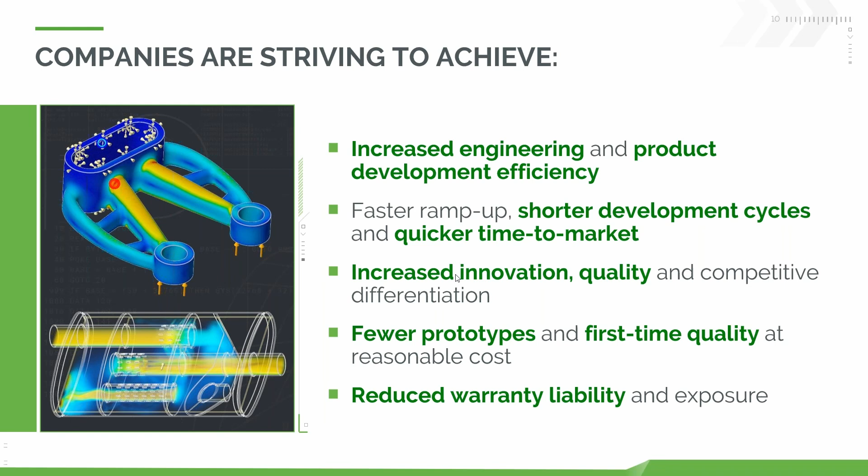And hopefully that then, if it should, then reduce our liability if we're producing a large number of components. Okay. So this is how it helps an engineer: a deeper understanding, validating your design, which of course you need to do quickly and early in the design process. Evaluate the design flaws or any potential design flaws, and if required, optimize designs.

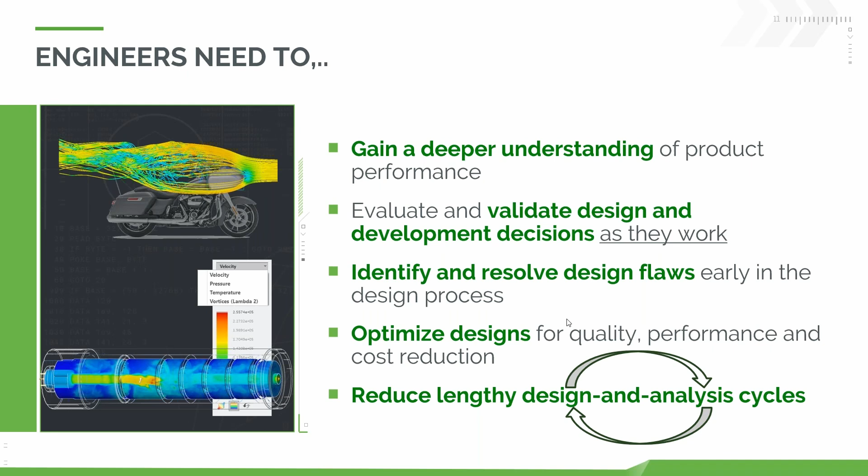And these days optimization is something that can be done relatively quickly and easily, providing you've got the technology to do it, and you can further reduce costs. Okay, and really, I guess importantly, the main thing I would say is we're trying to reduce a lengthy design cycle. We're trying to cut that down, and as part of that, cut down physical prototypes and things like that.

All right, so let's look at topology optimization. So there's a few different ways this is referred to within Creo. It's called generative design, topology optimization, GTO, specifically within Creo. It uses artificial intelligence and also simulation, so FEA, to help generate the optimal design. Okay, so we have done webinars and things like that in the past on this to explain it.

However, this is a common example that we do use, but imagine that we know that we're designing something in this sort of blue region here. That's where it needs to interface with another component. Also down here as well, where we've got blue, it needs to interface with some bolts or something, or a pin. Okay. We also know that in red, there's something else that's going to occupy that space. So what we do there is we say that becomes excluded, like we can't create our geometry for it.

And as part of this process, we also do effectively things that you do in finite element analysis, and that is you would create loads and constraints, and of course material properties. And we initiate that. So this process basically goes away and it solves an FEA type problem. And if you're familiar with how that works, there's effectively a mesh, and it will just remove areas of low stress and then rerun it, and remesh, and so on and so forth.

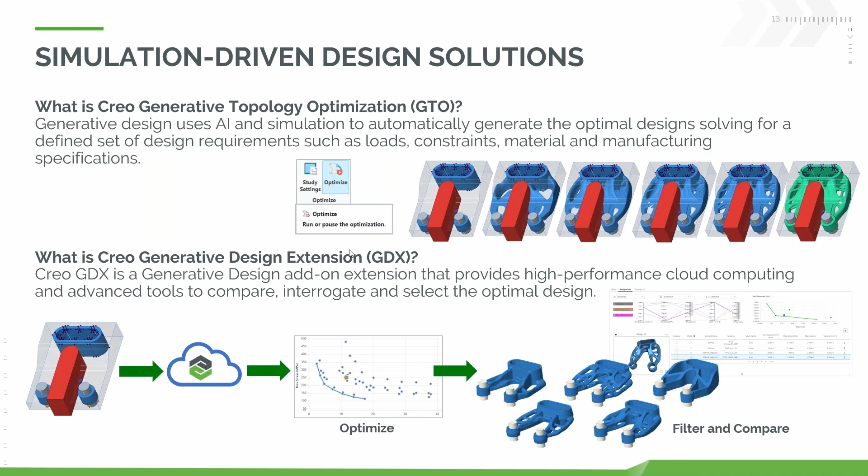All right, so moving on to now, this is no longer generative design, it's Creo Simulation Live. This is technology that ANSYS developed a number of years ago now. They call it Discovery Live, and it's embedded inside Creo, and it allows us to provide real-time feedback. And when I say real-time, you'll see what I mean when I show you the software, how quickly we get results.

Now, there's a list of different capabilities there, but we've got structural analysis, modal, thermal, and also fluid flow. And there's different license options depending on whether you need the fluid flow simulation or not. So that's Simulation Live. That's done with your GPU, effectively in real time. You'll see that. All right, ANSYS simulation, or also I'd say Creo Simulate as well.

That's high fidelity results, a traditional FEA approach. We mesh it, we can have some control over the mesh, we can have some more real world impacts with respect to how models are contacting each other, if we're using non-linear materials, and or large deformation and things like that. So if we're starting to get right into it and want really high fidelity results.

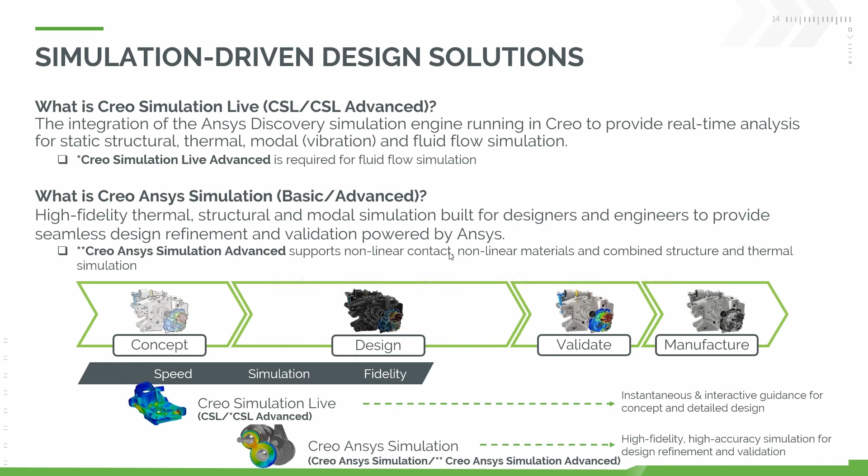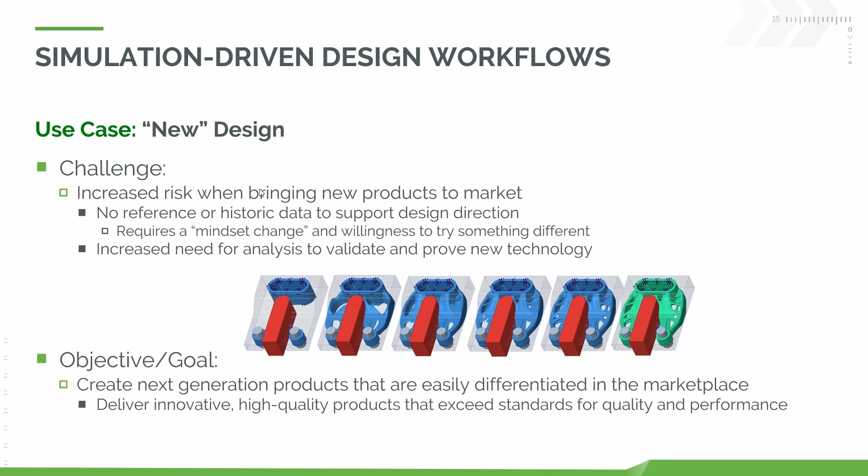And then this one here is for the quantitative. So if you want accurate results, then you would use ANSYS Simulation or Creo Simulate. All right, so if we look at this, Creo Simulation-Driven Design, this is showing the same slides. I think we might just jump over that so we can have time for the demo.

But topology optimization, this is just showing you the ability to set different parameters within there that control what geometry gets created. So in the first case, you're allowed to limit the volume to 85%. If you limit it to 55%, it takes those outer bits out of there. So there's a lot of different parameters that you can set up inside topology optimization.

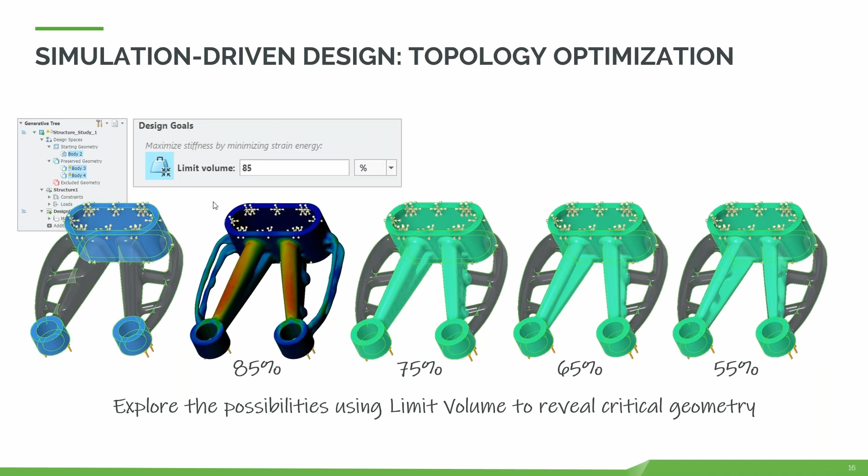Okay, so these are some other things that are available. There's the design exploration extension. Effectively, this allows you to have different scenarios you might like to run. So you can have within the same part file different stages of it, which you can analyze, and you can just swap between them, and it gives you some way you can record what different changes you might have made.

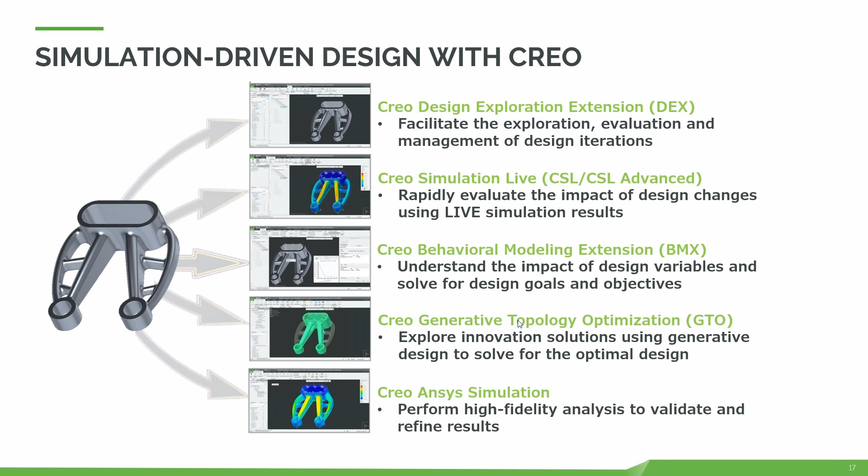All right, Simulation Live, we talked about. Behavioral modeling is multifaceted, and it can do lots of different things, but probably where it has its most power is in the ability to do things like geometry optimizations, things like volume, or something like balancing a crankshaft. Topology optimization we've talked about, and so have we talked about ANSYS Simulation.